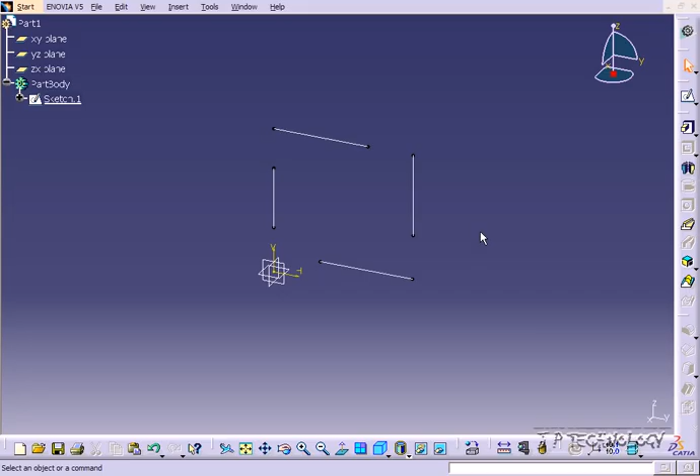To start off, open up tutorial part number 18, which is located on the DVD. Once you have it loaded, let's go into the sketch by double clicking on it, and now we're into it.

In this tutorial we're going to go through the trim extend features within CATIA V5. These are the trim features you're able to choose from, you're able to delete an entire section or break it, it's up to you. The tool I'm going to specifically focus on in this tutorial is the trim.

What I've done here is set up some lines, and what we're going to do is trim and extend these lines to make a square.

To start off, let's click on the trim. To use the trim, you click on a line, and then you move it, and it's going to move one of the points up and down until it touches. Let's trim this line and make it touch that line there. Let's click this line, and you can see that we're now able to move it up or down. We want it to go to that point there.

To make it go just at that one point there, we're going to highlight this line here. Now it's in line with it. Click, and now it's in line.

Now let's keep going around and finish the square. We'll make this one in line with that, make this one in line with this one, and let's make this one in line with that one there. And now we've made our square.

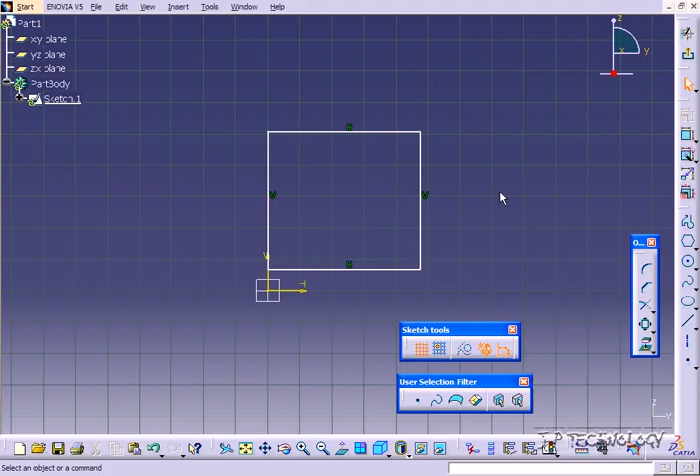Being able to trim different edges and whatnot is a very powerful tool in here. You're able to piece together sketches and then trim and extend everything until they complete a whole profile. So I'm going to show you another one.

I'm going to make a few lines, and we're going to make a triangle. In this one we're going to trim them. In the last one we extended everything, this one we're going to trim the edges.

Let's click trim, and what you have to do is click on the side that you want to keep. In this case we want to delete this side and we want to keep this side.

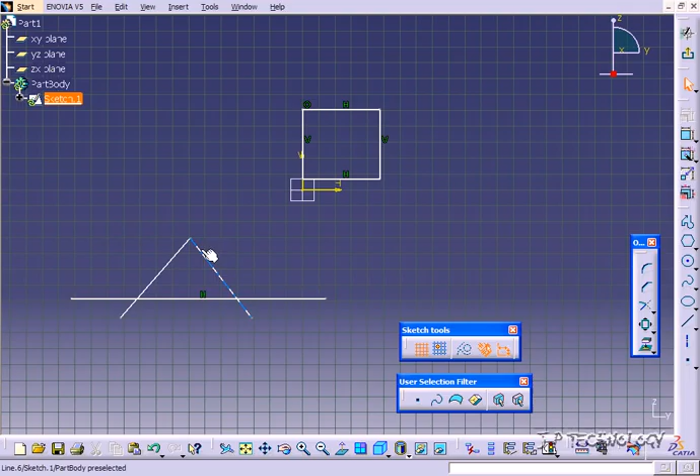Let's click right here and bring it up to that line. As you can see, it's deleting that other line there, so you're going to have to move it around until you get the result you want. We want both of those at the top to be gone, so bring it to the side there, and now we've got both. Now let's do the same to the bottom.

Let's keep this side here, and we'll trim this one here too. And now we've got our triangle.

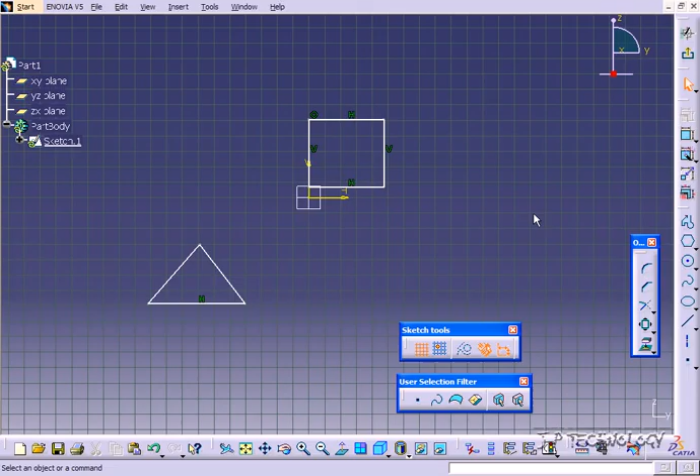Now let's take the circle and put it on the top of the triangle here, and just pull it out a bit. Now let's try to trim some of these edges so that we have just a single profile.

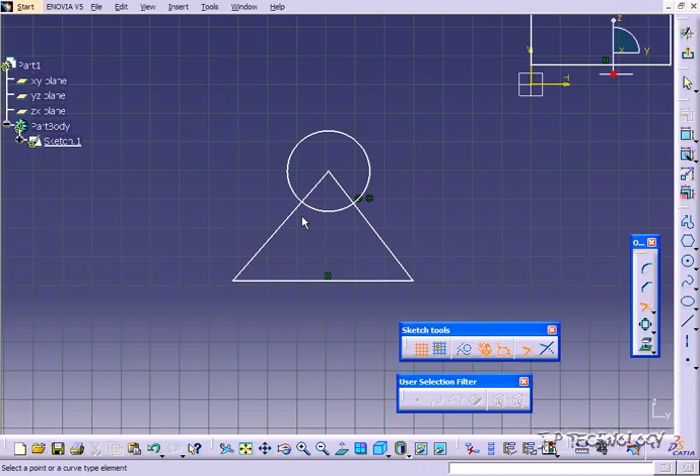Let's click trim. We want to keep this side, so we'll pull it up to there. And we'll do the same to this here, bringing it around until it touches there. And now we've trimmed those sides.

This is a great tool as you're able to piece those together and make the profile. If I wanted to do this independently, I would have to do a 3-point arc and slowly build all these together. Using the trim, you're able to throw all the objects in there and then start trimming away the excess. So the trim tool is a very, very powerful tool.

The more you play around with it, the more you'll know. You just have to use it to learn and to know when to use it. It's a great tool, and it'll help you put sketches together quicker, easier, and get the results that you want.

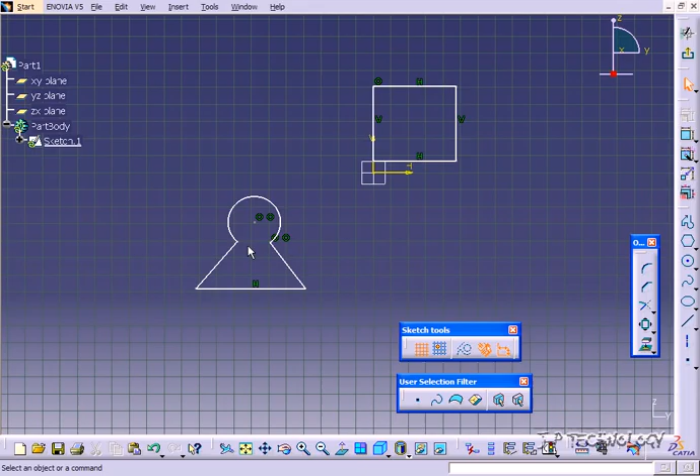And this concludes our tutorial on how to use the Trim Extend sketch feature within CATIA V5.